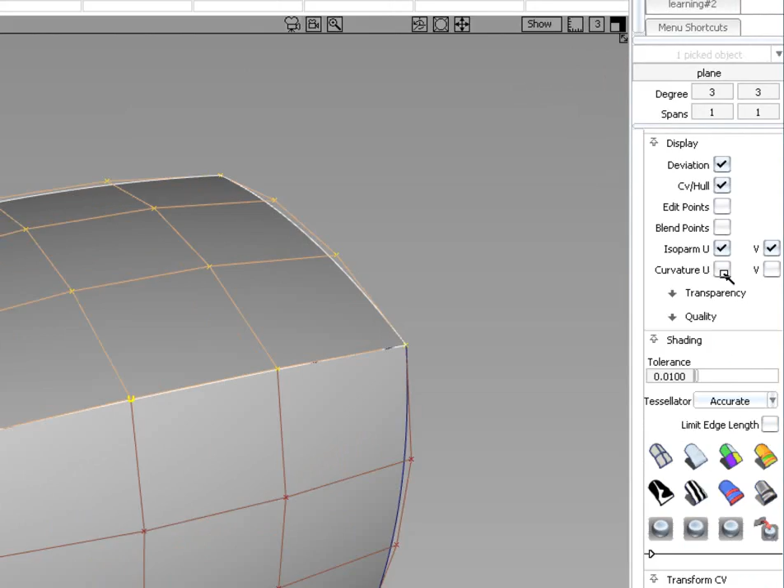I am going to show you through this quick video how to do a G4 blend. Now I have a very simple surface set here in order to explain the concepts behind getting a G4 blend to work for you. So I have two surfaces here, one on the top and one on the side. Both of them are degree 3 by 3. If I turn on the curvature combs, you can see the characteristics of both of these surfaces is that they are slightly bent. They're slightly bent in two directions.

Now there are two techniques in order to do this. The first keeps your theoretical intersection, and is the technique you would want to use in industry. Uwe Rossbacher has done a presentation about that technique in one of his Autodesk University videos. I highly recommend watching that. I'm not going to do that because it's much slower, and the concepts behind G4 are easily explained in the

second technique as well. Now the second technique does not keep the theoretical intersection, which is, of course, to reiterate, this line where both surfaces meet each other. That's the theoretical intersection. So I'm not going to have that, but I will be able to explain the concepts of G4 just as well.

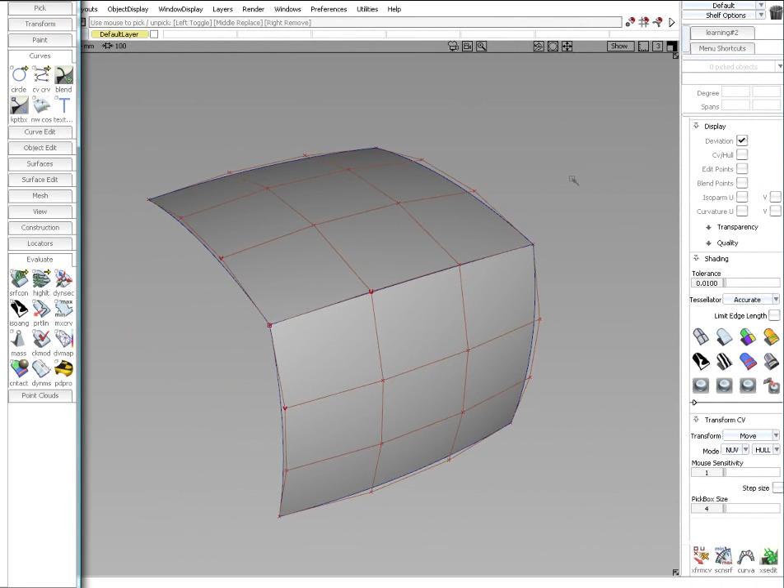Now I'm going to go and open my palette. The first thing that I'm going to do here is I'm going to go under surfaces. I'm going to use a tubular offset. I'm just going to use the values, as you can see here, and then I'm going to click on this surface. I'm going to do a pick nothing, and I'm going to click on the other surface and do another pick nothing. So now we've created the opening for our blend to go.

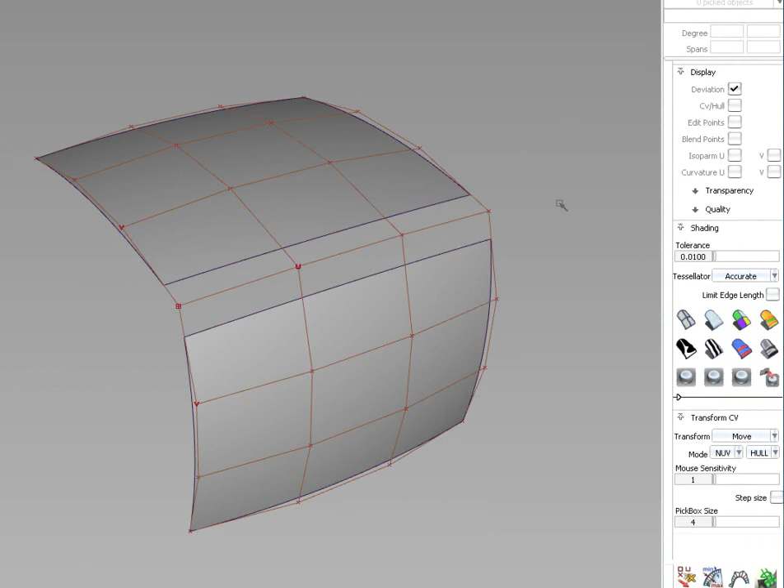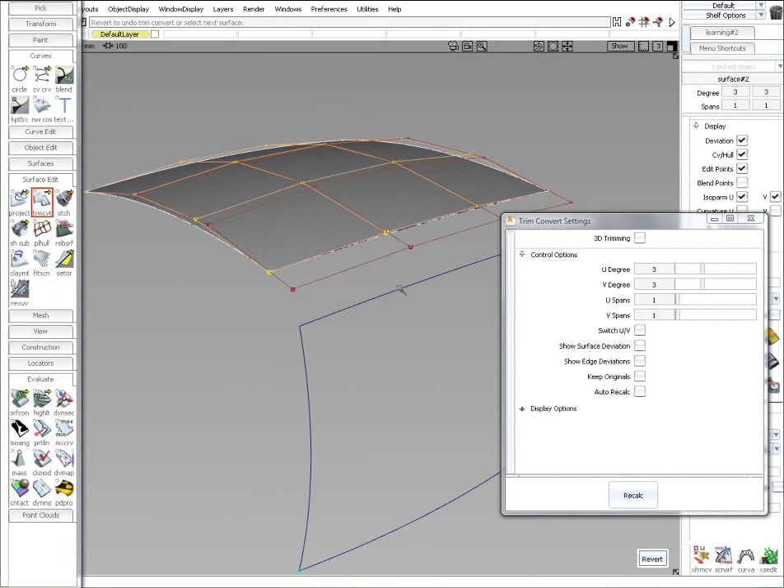I'm not going to keep the theoretical intersection, so I'm going to go into surface edit, and you see trim here. If you click on this and hold your left mouse button down, you will get a little menu. So I'm going to choose trim convert. I'm going to double click, and I don't want to keep the originals. That will probably be on by default. This first one, then I'm going to click on the second one, do a pick nothing, and reshade. So what you will see now is that we have two surfaces. Both of these surfaces now have the area where the blend will go, so let's go and do that.

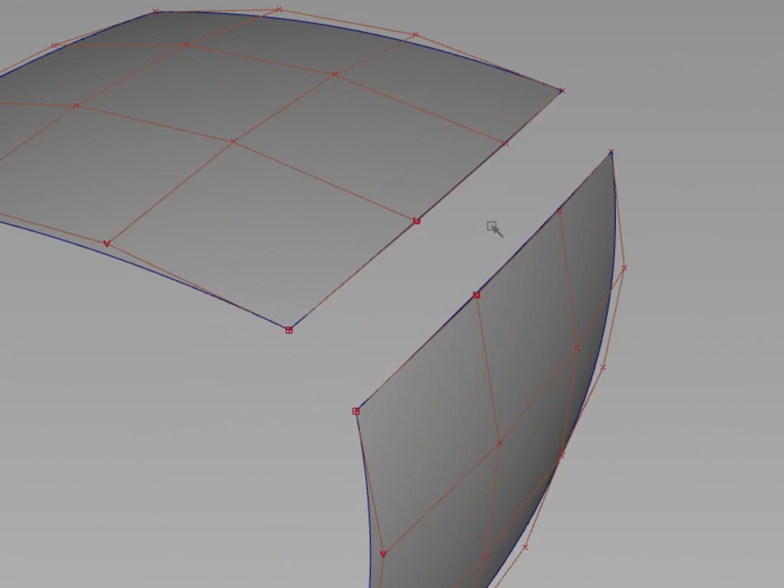I just want to reiterate, if I turn on the CV hull, you can see that we lost our theoretical intersection. It's gone. Okay, it is gone. It's not ideal, but trust me, just roll with it.

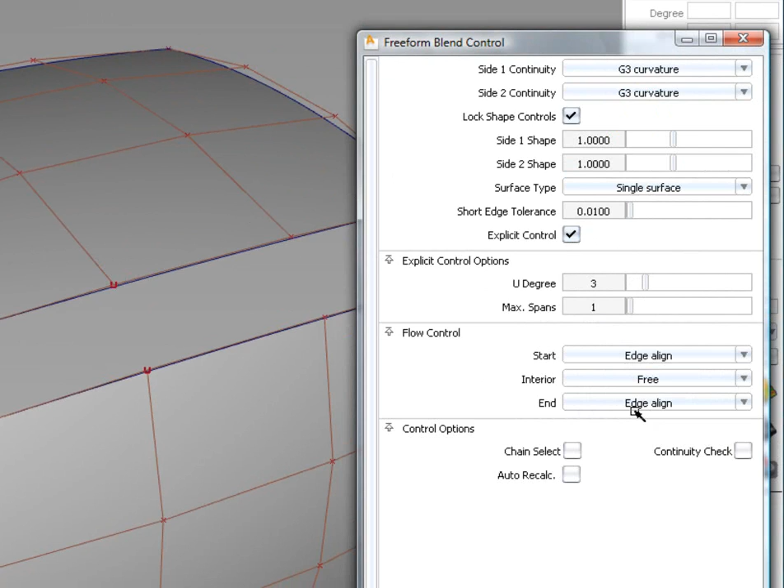We're going to go to surfaces, and we're going to do a freeform blend. Now, the freeform blend is going to be a G3 on both sides. Single surface, explicit control, 3, because we have 3 in this direction, the U direction in this case. Make sure the flow controls are on edge align for both the start and end. And then we can pick both surfaces and hit the space bar, and we have our surface. So we would think that, alright, we've got this.

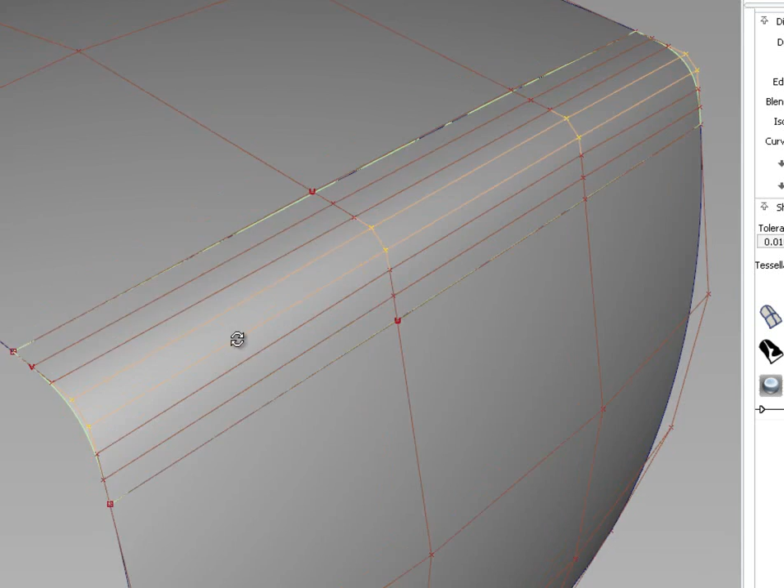So what we would need to do in order to get a G4 continuous transition here is we would need to edit these CVs, and these CVs, which is the G3 row. We would need to pinch those in even further in order to get a smoother transition and in order to get G4. Now you can notice the problem with this is it's going to create a radius here that is far too huge, and it's not going to be a smooth transition at all. It's just going to be a pinchy, very sharp transition.

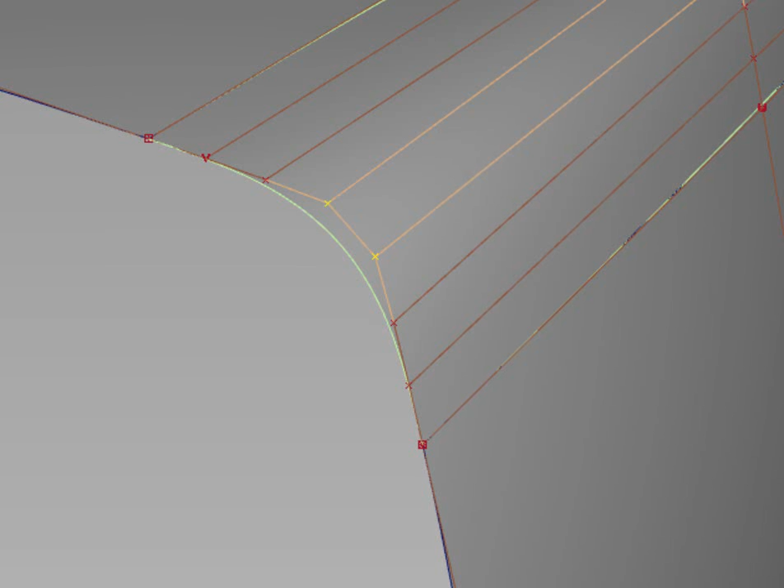So the funny thing is, a curvature comb might give you kind of that G4 look near the zone where the blend begins, but it's not going to give you the G4 feel that you want, which is a very smooth blend. Now, if I put the curvature on here and I choose radius min, you can see it's already a minimum radius of 80, and this is just going to get more insane as we push these further in. So clearly, we can't really touch this blend surface.

You know, this surface, turn off its CV hull. We can't touch it. There's nothing we can do to that in order to make this G4 transition. It's just not going to work.

What do we want to do? Well, it's really simple. It's based on two concepts. The first concept is you need to have enough room for that fillet to go, for that surface to go. This surface needs to be much bigger so it has more room in order to get that gradual smooth transition going. The second thing is our primary surfaces, if we look at the curvature comb characteristics, you can tell it's just an arc. It's not doing anything.

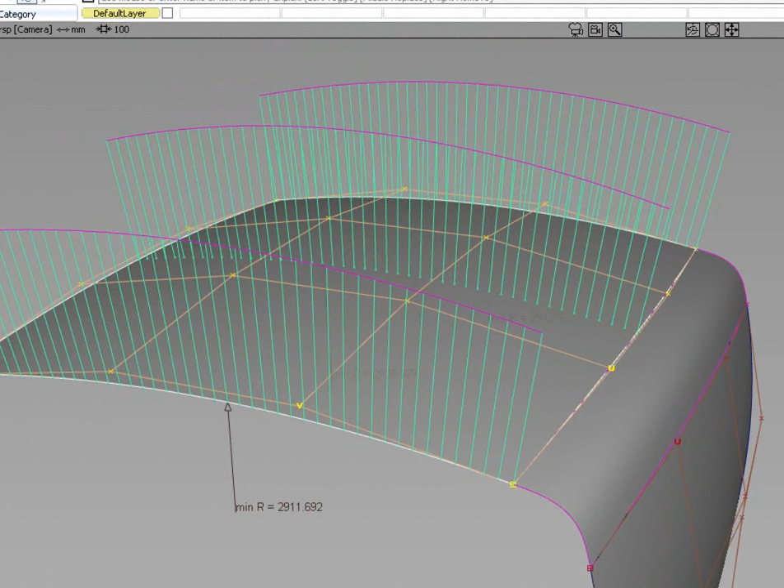It's just an arc. Even at the tangent edge where the transition happens from primary to secondary surface, it's not helping at all. We need this surface to help along to create the G4 transition for this blend in order for that to work. So it's really quite simple if you understand the basic concepts.

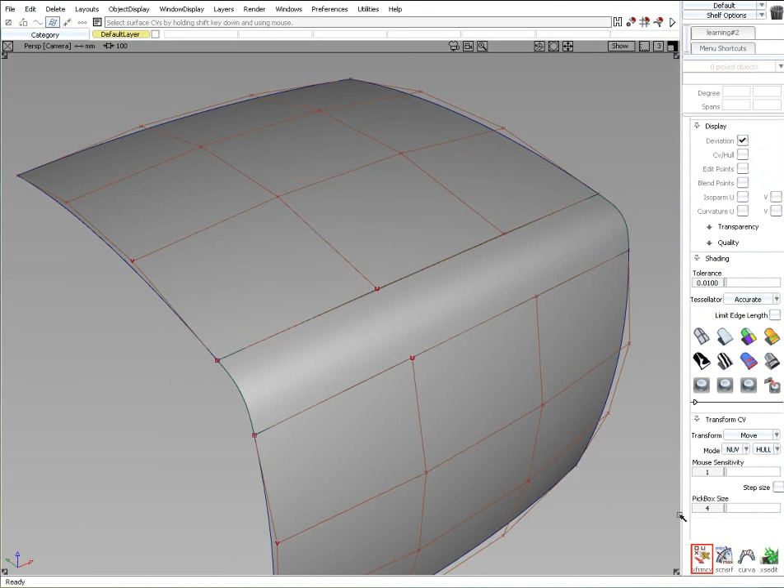We're going to use Transform CV for this, and if I turn it on and then you hit the space bar, you get this little radial menu depending on the version of Alias that you're on. And we're just going to use two tools. It's really easy. Slide, hull. That's what we're going to use in order to get this transition done.

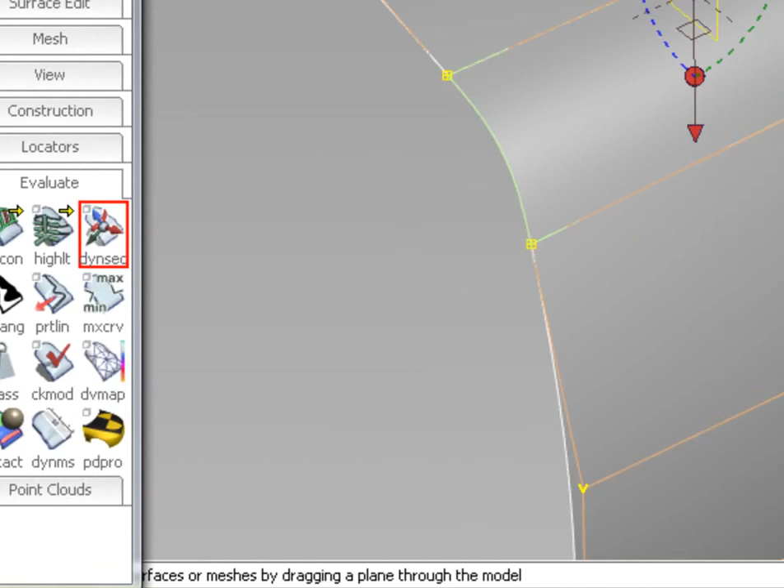But first, I actually want to select all the surfaces and open my tools palette. Go to Evaluate and choose Dynamic Section. Then choose your right plane and move it around in case that you must. And then you will see this little red section line. We want to turn on persistent sections and curvature on. And this actually looks about right.

If it doesn't, you can adjust the scale here. The scale is all relative. You don't really care about the scale. The scale that this has in proportion to this, that's what matters. So you can pick any scale you want. I want a pretty drastic scale so I see what I'm doing. And sampling rate at 90 sounds good too.

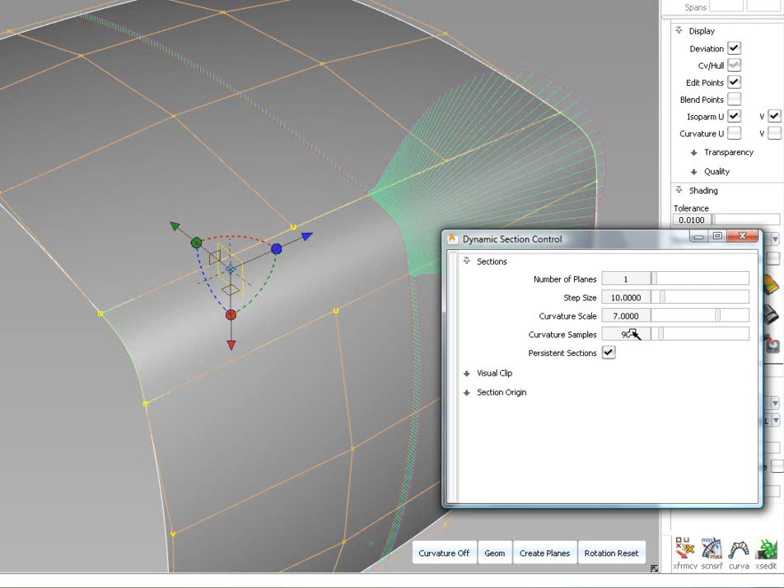So I'm just going to go out of here. And I'm going to go back into Transform CV. It's still on Slide Hull because it remembers the last setting there. And what I want to do is really just two things. Let's do this multicolor shader thing so you can see better the differences. I want to do this until I have light colors. There, that's good. So you can see clearly where each surface is, right?

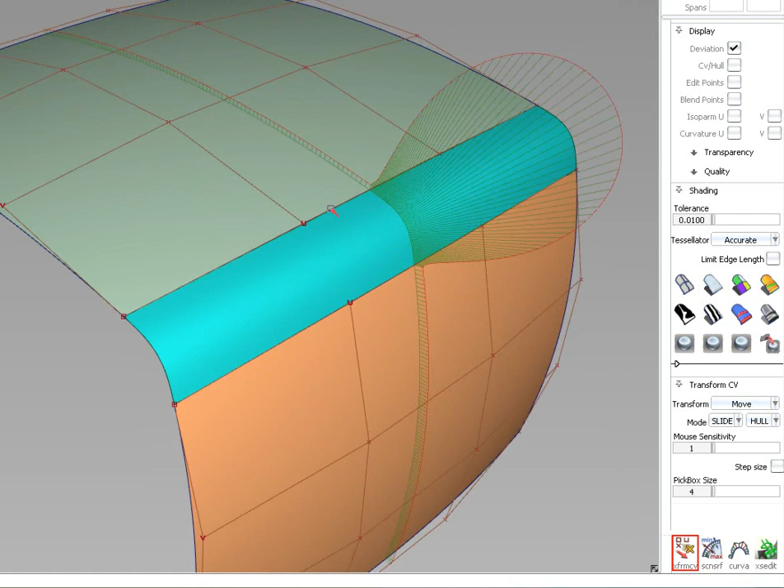So I'm going to pick on this. That's the tangent edge. We want this to be much bigger. So we want to slide it further back. Notice what this does. It's amazing. The difference is huge. It's absolutely huge. Just giving it more space for the fillet to run immediately makes the situation enormous amounts better.

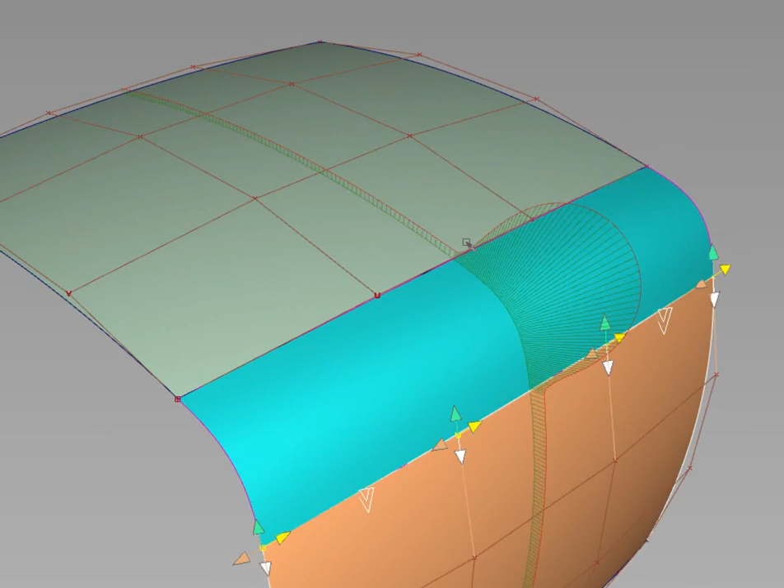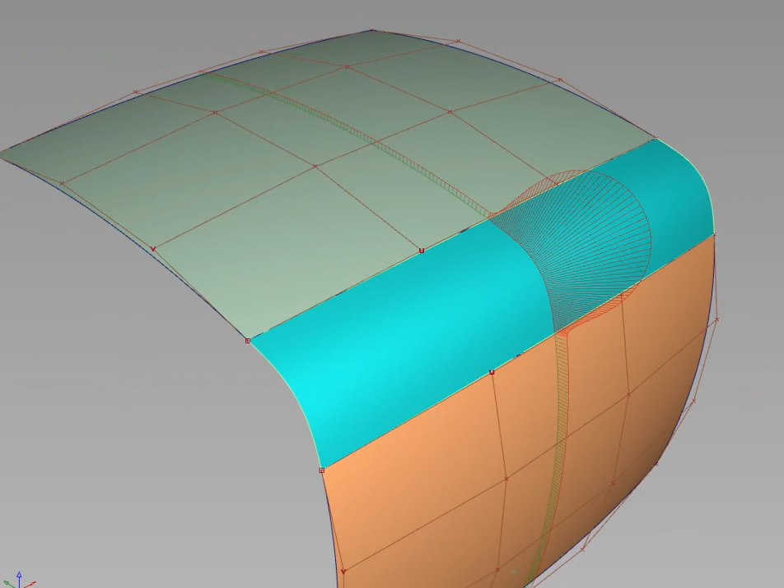Because notice two things. Around this region, it's much smoother. And around this region, which is the opposite surface, it's much smoother as well. Notice the peak curvature here has decreased dramatically. If we pick this surface and we put the curvature combs back on, you can see the minimum radius is now 131, which is already a lot nicer. It's already less pinchy. We're giving it that room that it needs.

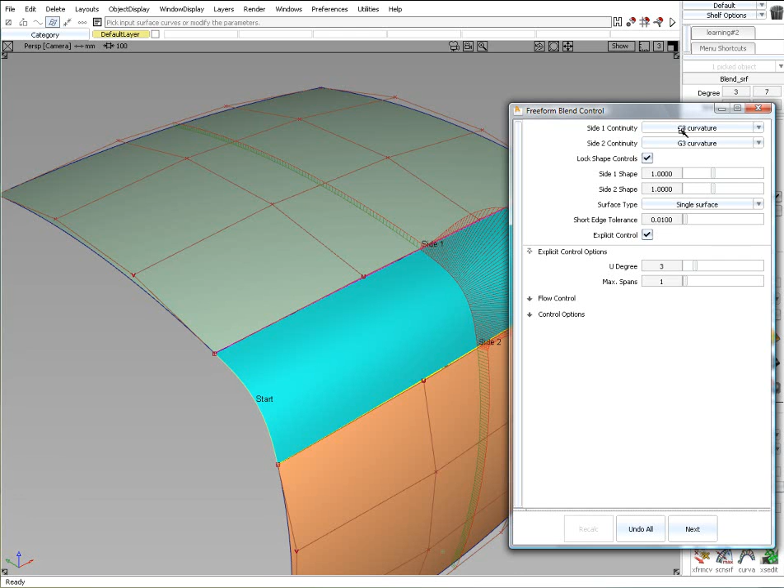And of course, Alias is a terrific piece of software because this blend, if I go back into its history, it's G3. So, if you've got a recent enough version of Alias, you can enjoy this. It will help you. It's not mandatory. You can do it without all the automatic stuff, but it will help you.

Now, that's one thing. Give it enough room. That's by dragging the actual borders of the surface. Now, if you had the theoretical intersection, that would have been more difficult, right? Because you don't have those hulls to play with. Now, the next thing, I will go back into Transform CV. I will hit the space bar, and I will use exactly the same tools. Slide, Hull. Now I want to pick the tangent row.

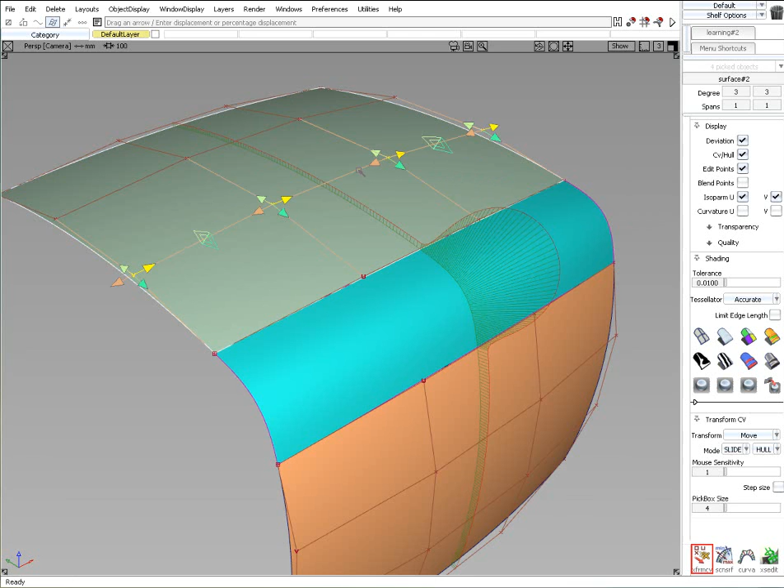What the tangent row is going to do, it's going to allow me to have the surface start to accelerate before it actually ends. Notice this. I'm going to slide. It's pretty important which row you slide, because if you slide this row, less is going to happen because this is the direction that's already going down. We want to slide in the direction that's pretty straight. So that's actually this direction right here. And we're just going to slide this.

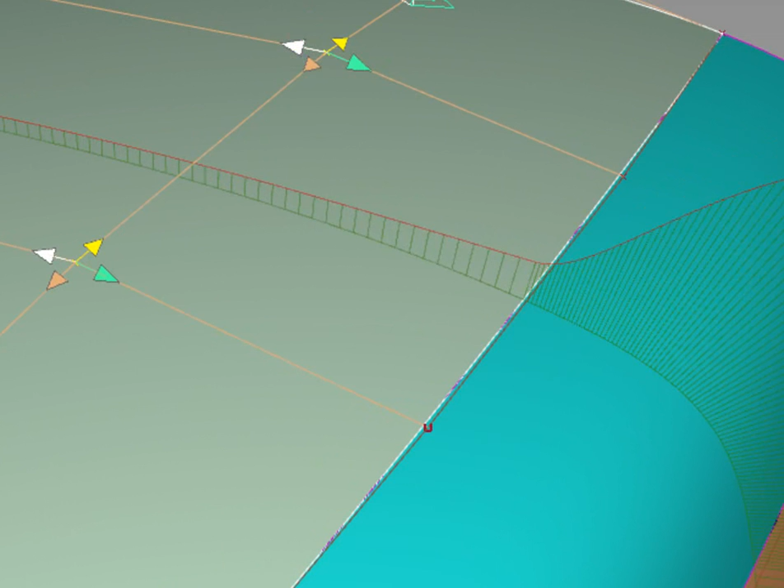And notice that it's growing, right? The curvature distribution along the end of the surface is starting to go up. And when I let go, notice the blend update. Massive difference. Absolutely massive. The difference is night and day.

We're going to do exactly the same for the opposite surface now. We pick this hull, which is the tangent hull, and we slide it along the direction of area that's more straight, kind of, right? And we slide this up, and you see it just going up. And if I exaggerate, it's going to go up a lot. We don't want this. We only want it to be maybe about that. We let go, the blend updates, you get that.

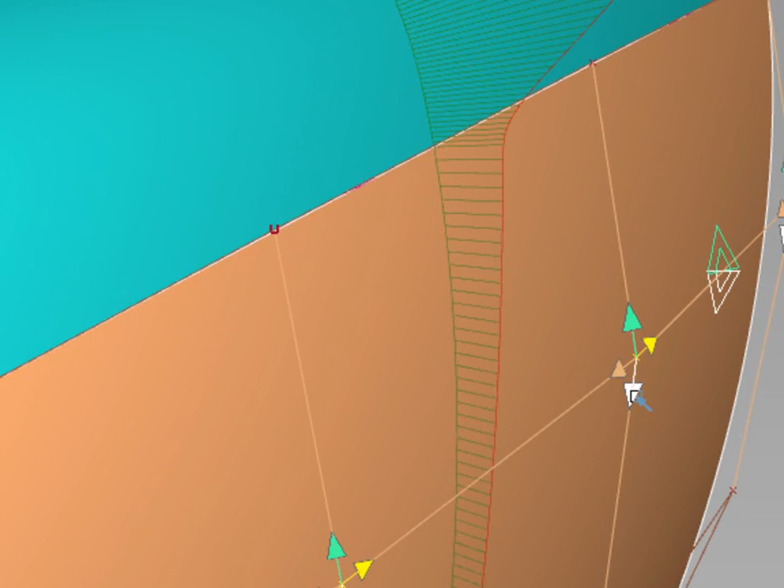We actually want a little bit more. Boom, we get that. Maybe we slide this hull back a little bit further so the blend has a bit more space. Boom, we get that. This is already starting to look like G4. It's still got a slight bit of a dip. If we look, no we don't. This is good, right? So basically those are the two concepts.

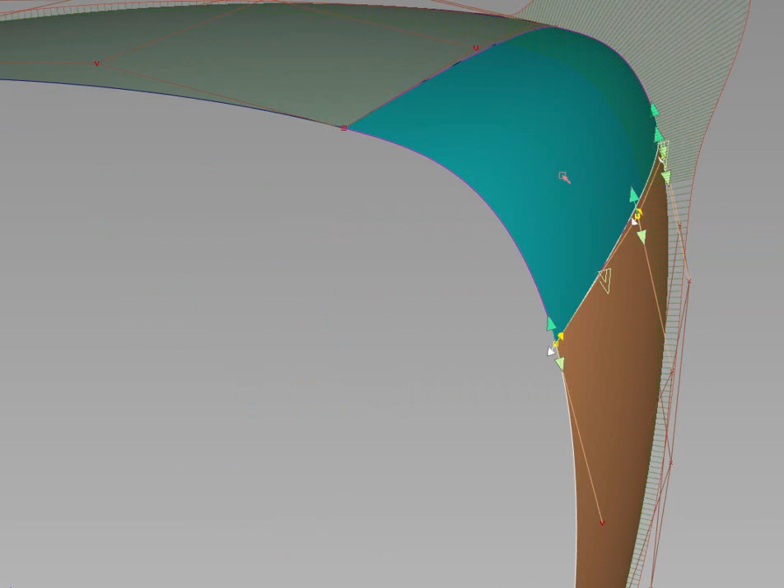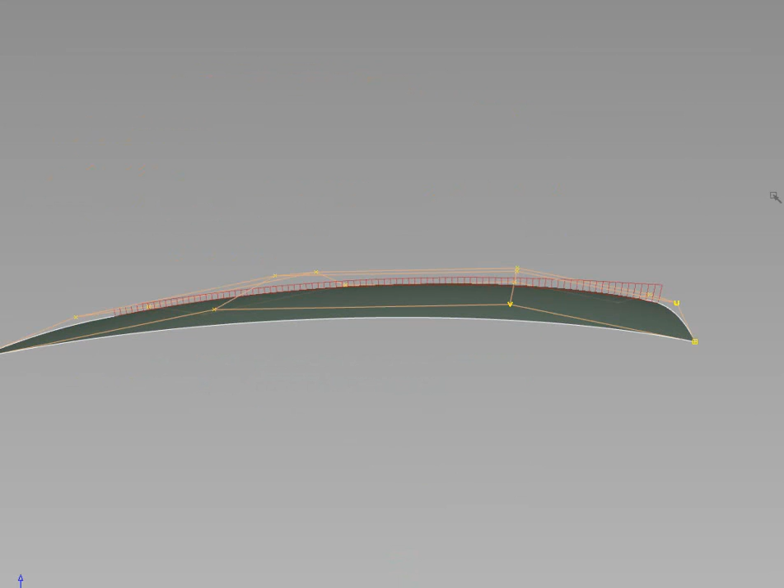I'm going to go and deselect everything. What I want to show you is each surface separately. So if I select this surface and I use the really cool tool here under Object Display, Hide Unselected, if I do a look at on this, now this is not very large. I'm just going to select the surface and put curvature combs on, and then I'm going to turn the scale down a bit. Maybe give me some more samples. You can see what it's doing, right?

So it's got that R characteristic, and then as it nears the edge that's going to have this G4 transition, it starts going up. It starts flowing into. If you don't do this, you'll end up with arc, right? It's going to be mechanical. It's not going to be smooth. It's not going to be G4. It will not be what you're after. It will not give you the highlights you want. It will not be the smooth G4 thing that you're after. Okay, I hope I'm clear enough. You must do this. It's a lot of work.

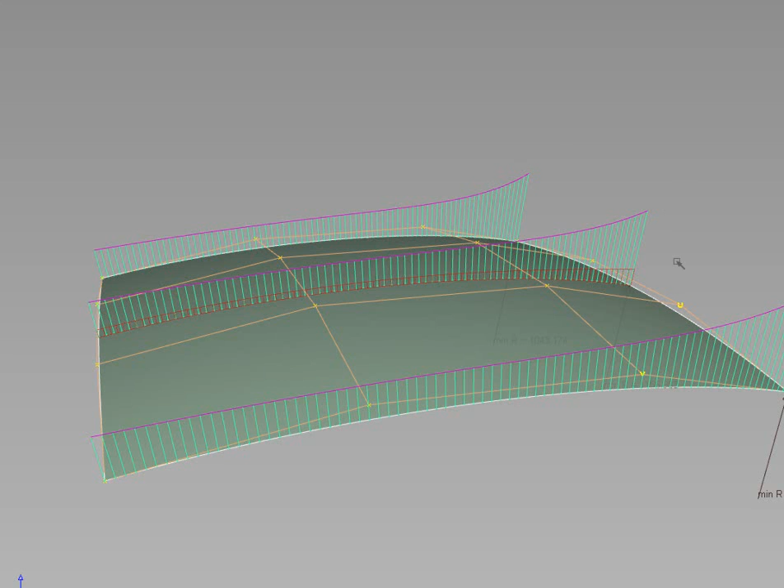Now, here it's pretty easy because I trim converted these, right? If you have to keep in mind that you have this theoretical intersection that you don't want to blow away like I did, this will be more difficult, but the concept is the same. Okay, so I turn this back off. I'm going to Object Display. I pick Visible again, and everything's back.

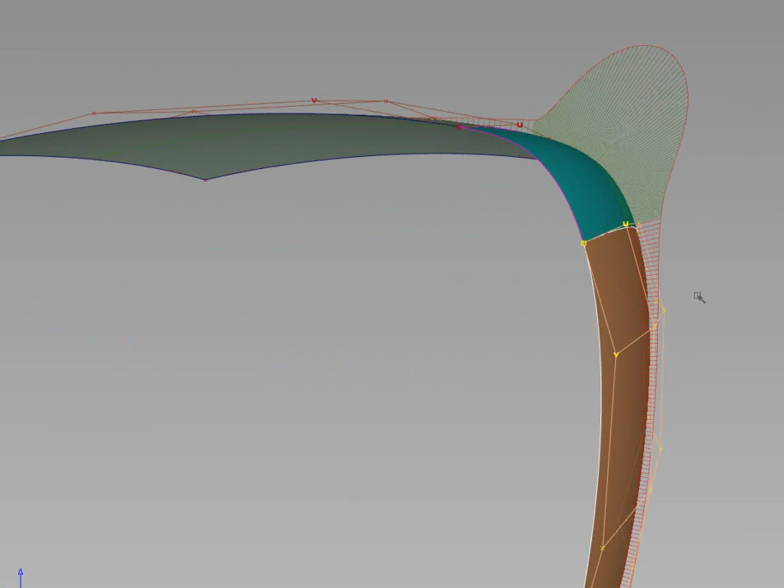Now, the same is true for this surface. I'm not going to hide unselected on this one, but you can see, it's the same thing going on here. You have this kind of arc, and then you're starting to go up into the fillet. Then notice the characteristics on this blend. I'm going to turn the controls on because that's important, right? You always want to check your CVs.

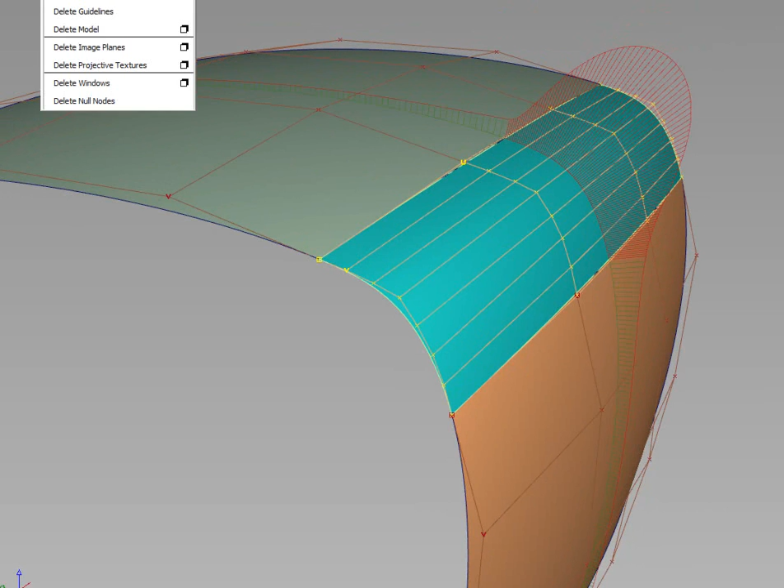I am going to do a quick Object Display Hide Unselected on this because I think it's important. It's important to notice the start here, right? Think of this tangent length. Think of how long it is. And then here, think of how long that is. Actually, these should be more balanced out so they're about the same length, but it's a small thing. But think about this length compared to the peak radius and how long that is. That should not be absurdly different.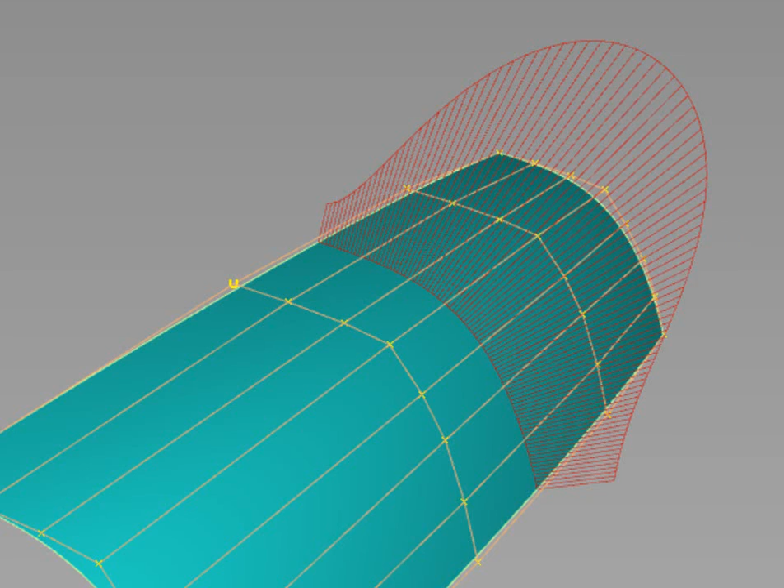That's important, because otherwise you get that really pinchy fillet that should be G4, but it's really not giving you what you want. Well, in this case, it is giving you what you want. If I turn the curvature combs on, look at the minimum radius, 162. It's pretty large, and that's what you want. You want a nice, large, smooth blend, right? Well, this will give you that. It needs to have enough space. It needs space to breathe.

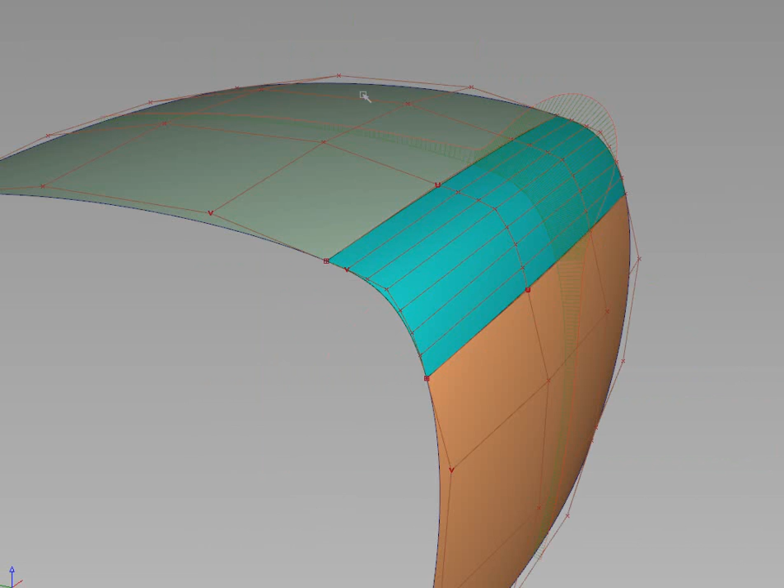Now, I'm just going to pick all of that and throw it away. Go to Object Display and Visible again. And I'm going to show you what you want to know. So I'm going to pick all these surfaces, go back into Dynamic Section. And I just want to uncheck this persistent box, do a pick nothing, and it's gone.

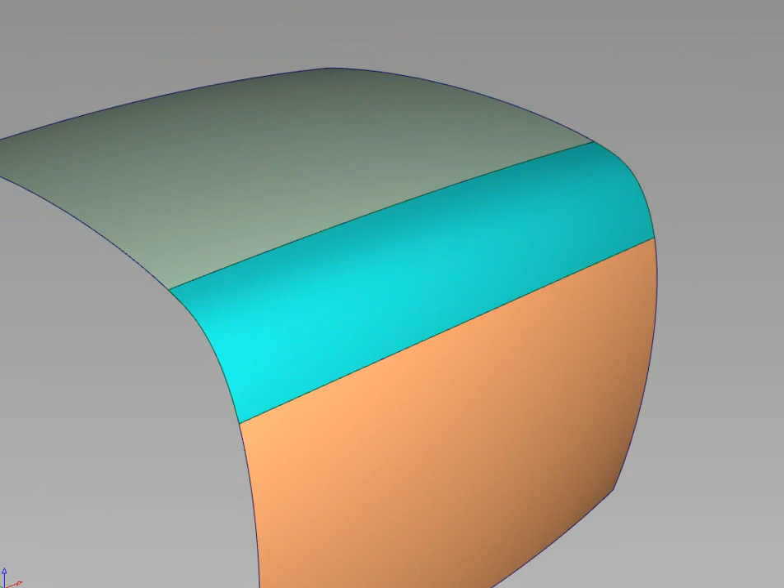So I'm going to select everything and do a controls off, which will hide all the CVs, and I'm going to go into the shader thing. If I toggle the model off as well, this is the result you get, and I'm guessing this is the result you want.

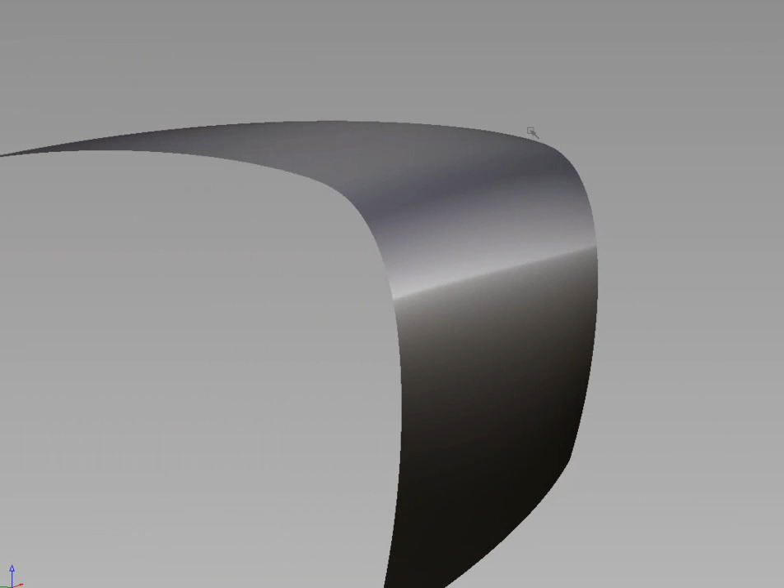Nice, smooth transition. You don't notice where the start and end is. You don't even notice that there's anything different. It looks like one surface, and you get a very smooth transition on there.

If I do the curvature evaluation thing, you just want to make sure that everything's the same color, preferably green, because that's what it should be. But it doesn't really matter, as long as it's the same color, you'll be fine.

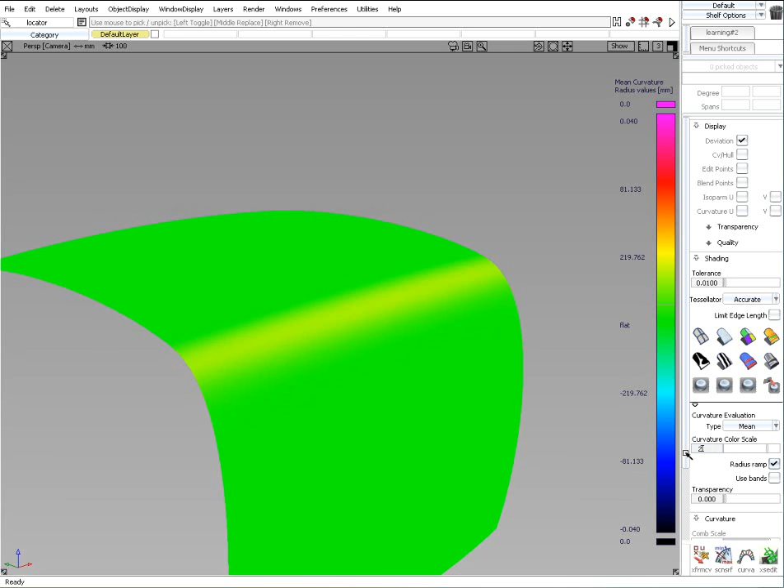And now if we just keep sliding this, we don't have that trumpet shape, it's very smooth. It's not going up and down in a wavy pattern or anything like that. And then as we get close to the tangent edges, it bleeds into the main surface like butterscotch.

It's good. Now Gaussian is generally like mean, but a million times less tolerant, because Gaussian will show you any and all problems you've got, even if they're not really big problems. Even then you can tell, this is just great.

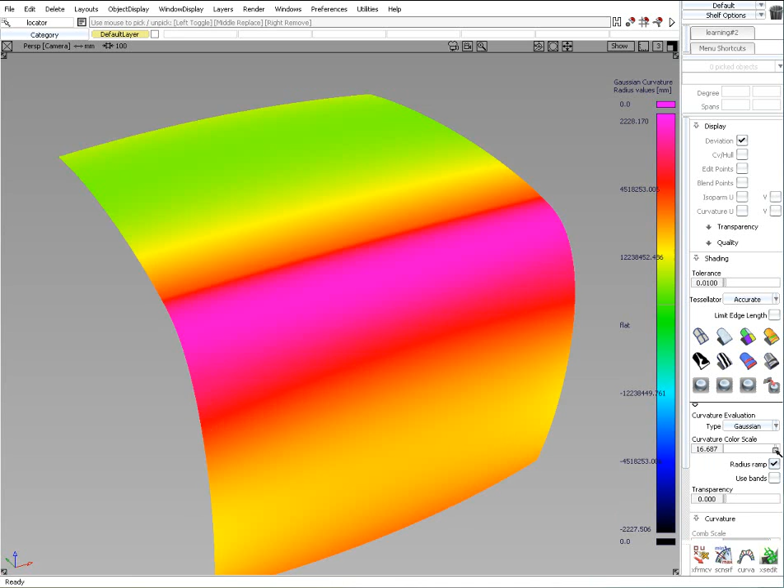This is great. Now we enter a value here. We can go beyond what the scale will allow us to do and then just go back. So you can tell this is the kind of transition that we're after, that we've got when you're looking at it with a highlight.

And then this is about the patch layout, for this simple surface set, of course, it's easy to demonstrate. So the relationship between the length, like the arc length of this compared to the length of that, it's pretty huge. The fillet is about maybe a third or a fourth as big as the primary surfaces are.

It's pretty big. You can make it even bigger if you want to. You just can't make it any smaller than this if you want a G4 transition. This is the minimum that it takes. You can make it bigger all year long, but this is the minimum that you need in order to get a G4 transition in this scenario with this surface set.

I highly suggest that you look at Uwe Rosbacher's video as well, because it is excellent, and it doesn't destroy your theoretical intersection, which my technique does.

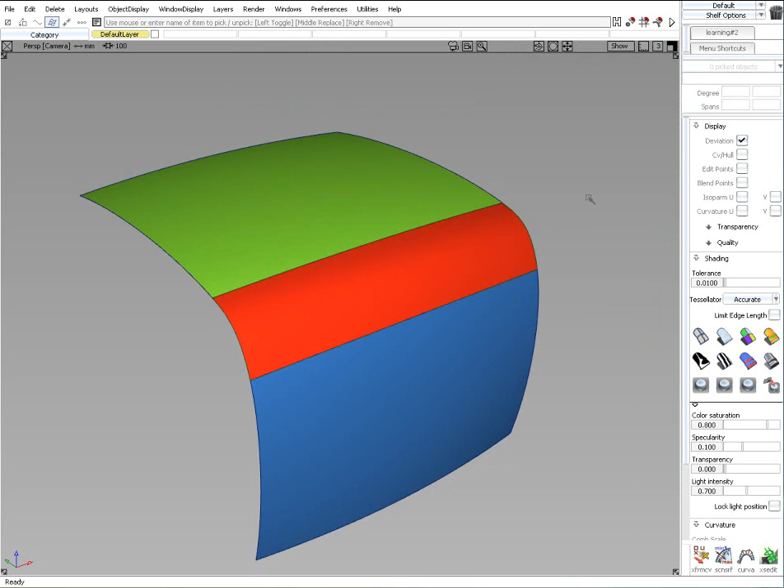Now, why is it important not to destroy your theoretical intersection? Well, there's just one reason, but unfortunately it's a very good reason: if a design change happens, typically the standard industry workflow is as follows. You delete all your blends, you bring your surfaces back to their theoretical intersection, and then you make your adjustments, your big general shape adjustments, and then you put your blends back in.

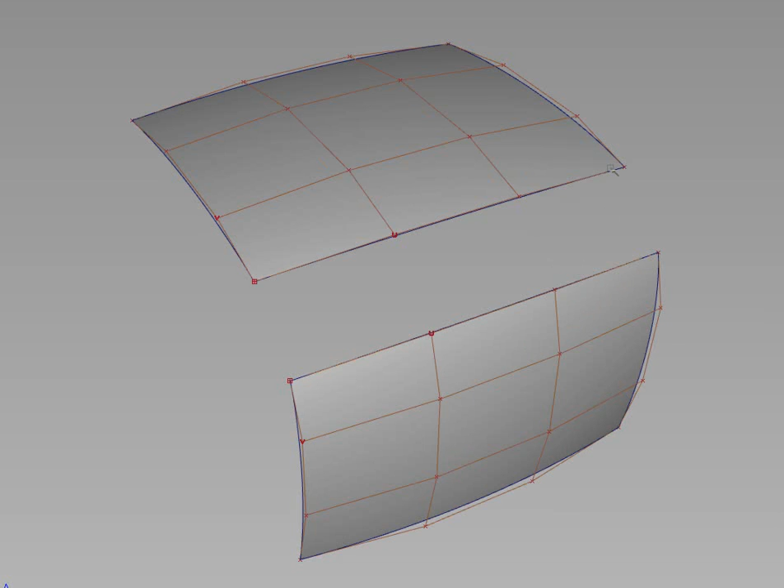You put your fillets back in, and so forth. It's fast, it's easy, it's reliable, and it will work every time. Tough luck, I don't have them anymore. I have a big hole here, and there's no way to really get the theoretical intersection back.

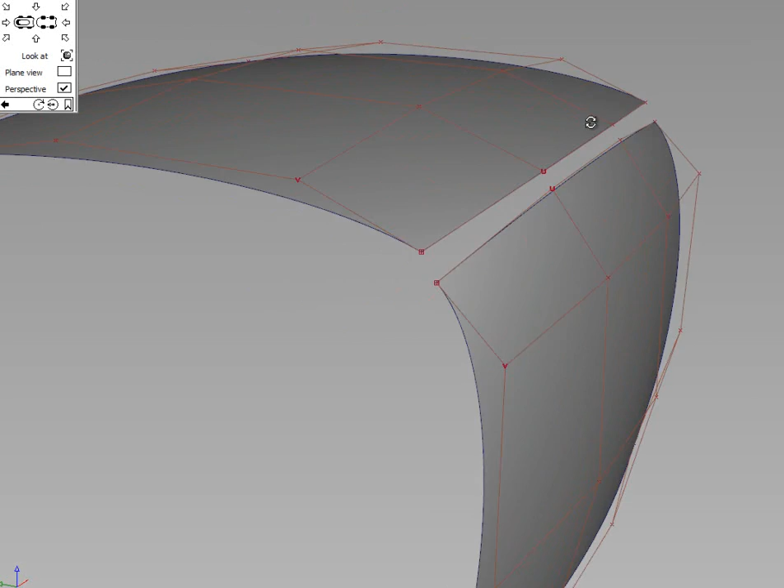I could use a tool like under Object Edit Extend, and I could desperately try to extend this kind of along the curvature direction, but it's not going to give me the original because we already tweaked the tangent CVs, and that will affect the way that extend works. In this case, it can't give us the original configuration because we were screwing around with this hull line, so this angle here is really way too sharp, and it's not what our theoretical intersection angle was, so we'd have to do a lot of work there.

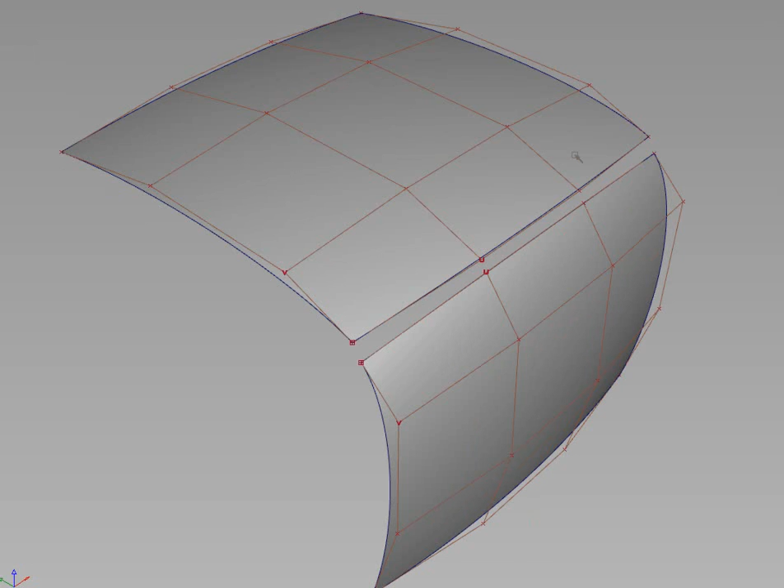So that's why you want to keep the theoretical intersection. However, for the purposes of demonstrating G4, to recap really fast: what do you need? Not just the fillet matters. The primary surfaces that it's connecting to have as much play into that transition as the fillet surface piece itself. You need enough room for the fillet to occupy in order to allow it the distance.

I hope this video was helpful to you.